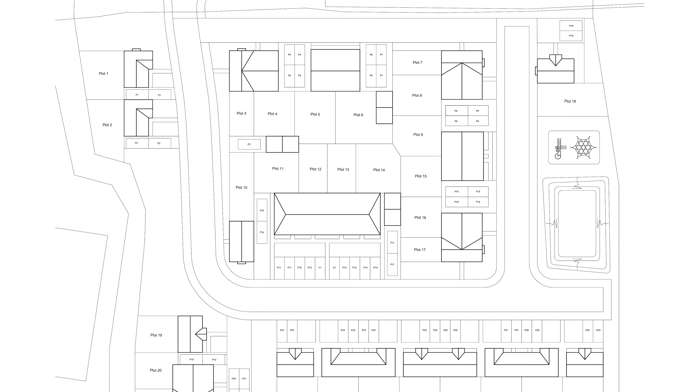In this video, I'm going to show you how to render a site plan in under 5 minutes while still getting really professional, consistent results every single time. First, I'm going to show you how this method actually works, and then I'll explain why it's so much better than the conventional way of rendering site plans. And at the end of the video, I'll show you the hidden setting that genuinely cuts your rendering time in half. It's a setting in Photoshop that most people never actually touch.

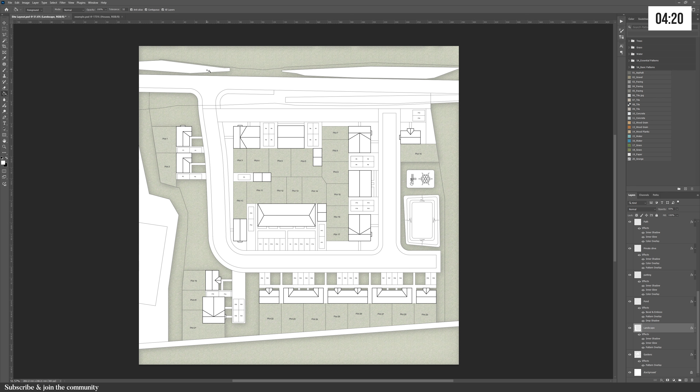I'm starting with a Photoshop file that I've already set up. It has all of the layers, effects, and patterns ready to go. Grass, roads, paving, water, parking, everything. All you need to do is select the layer you want and use the paint bucket tool to fill in the shapes with white. I will explain why white later in the video. As you can see, it is basically like an adult coloring book.

And the best part is, if you work in an office, you can set this file up once and share it with your whole team. So all of the colors, textures, and opacities are already decided, so there's no more debating how the site plan should look. Now normally, site plans take forever because you're constantly selecting shapes and applying layer masks.

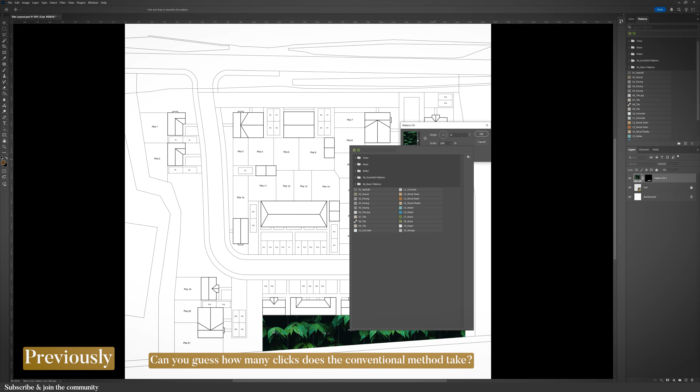Now don't get me wrong, layer masks are great because they are non-destructive, but they're also confusing. Half the time you're sat there thinking, do I paint this with white or black? Why isn't this showing up? Why did this just disappear? And try explaining all of this to a junior designer. It makes absolutely no sense. But when you set up all of the layers like this before you start, you don't have to think about any of that. You can color an entire site plan using just one tool without dealing with masks at all.

But the obvious question is, how does Photoshop even know where to fill? That's where the hidden setting comes in. When this setting is turned on, Photoshop looks at everything that's visible across all of the layers to detect the shape you're clicking on, but it only fills the layer you currently have selected. Now that the setting is doing the hard work for us, the layers become really straightforward.

For the buildings, I've set up 2 layers. One is a cooler gray and one slightly warmer gray. That way I can introduce variation between the buildings without adding extra adjustment layers. I just switch the layers and paint bucket the buildings that I want. But a quick tip: when you're filling in any layer that has a drop shadow, for example this building layer, I would recommend turning off the drop shadow first and then turning it back on at the end. Otherwise you do get fuzzy edges.

Now I actually filmed this demo about 3 times. The first time it took me 7.5 minutes because I kept making mistakes. But by the 3rd take I finished the whole site plan with 3 seconds to spare. The lesson here is that speed comes with practice and not talent. The more you practice, the faster you'll get at this.

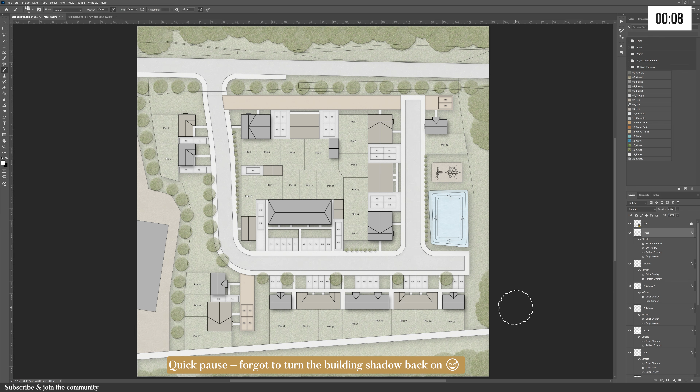For trees, I've set up 2 custom tree brushes. One is more linear and one is more scattered, so I can add trees really quickly without increasing the file size. But even then, there's still enough variation in the trees so that they don't look flat or repetitive. And that's it. But the real advantage of this method isn't just speed, it's also file size and flexibility. This is where the old method really falls apart.

Let's compare this site layout, which is 173 MB, to a site plan I did back in 2019. That older project actually had to be split into 2 separate Photoshop files because it got so heavy. Together, they are over 2 GB in size. This is the first file, and this is the second one with the trees and extra effects added. Please ignore my messy layers. This was back in 2019 when I didn't really care about naming my layers.

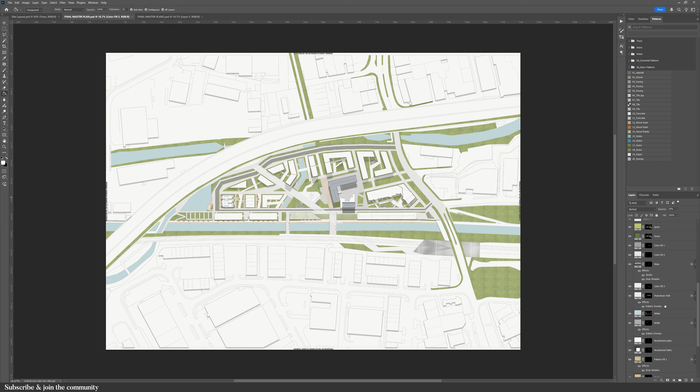If you look at the plan, there's nothing particularly special, there's nothing complex in the effects, but the file size comes purely from smart objects, lots of layer masks, stacks of adjustment layers, and high quality JPEG trees, which take up a huge amount of space. Another thing that takes a lot of time with the traditional way of rendering site plans is adding variation. In that older file, I used the same tree and then added separate color adjustments just to make them look different. But with this new method, it's so much simpler.

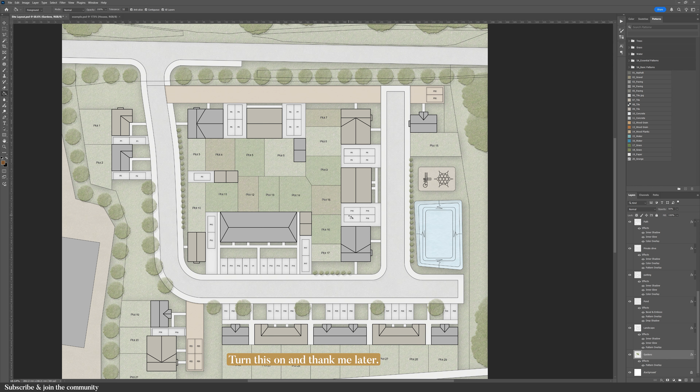If you paint with white, you'll get the exact color and texture I've already set up. But if you paint with a darker green, you'll get a darker green. If you add a bit of brown, it automatically shifts warmer. Now finally, as promised, the setting that makes all of this possible is this option up here. All layers. This one checkbox changes everything.

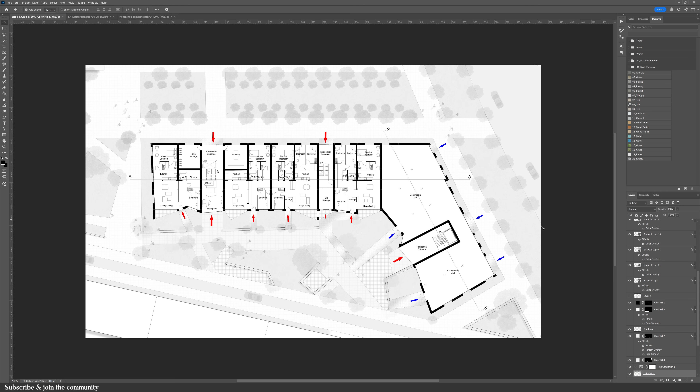To set this up for yourself, I guarantee you've already done most of this work without even realizing it. Go back and open your old site plans and see what you can reuse. Take the best bits from different projects and combine them into one clean Photoshop template.

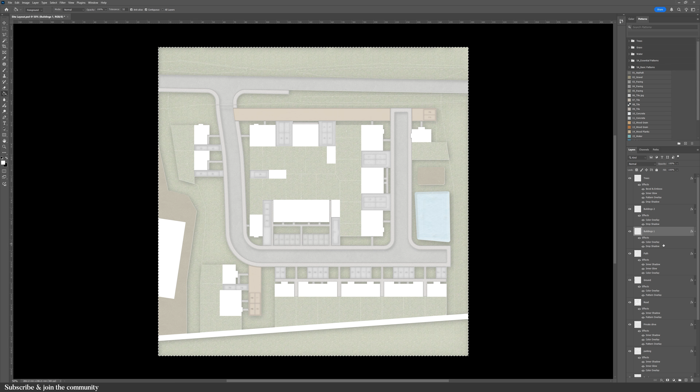Open the Photoshop file and clear the existing content. Drop in your own site plan or drawing and apply the same effects and layer styles to get results in under 5 minutes.